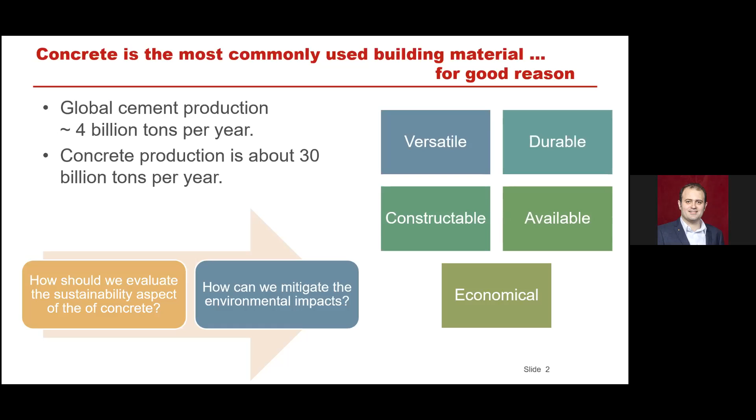But besides all these advantages, we should think about using these materials in a more sustainable way. And how can we mitigate the environmental impacts of this concrete mixture without compromising the performance level? So we decided to develop this ACI Eco Concrete competition to get all the students engaged in the concrete environmental assessment. And we define an objective and a research question for this competition: how can you as a member of the civil engineering community improve the durability and the environmental impacts of concrete mix design?

So for this version of this competition, we decided to go for the durability simulation using an approach to estimate the service life of concrete. And for the environmental impacts, we're going to use life cycle assessment as a tool to quantify the environmental impacts. I'm going to talk about each of these tools separately, and then I'll go through each tool and will give you an instruction related to the setup values.

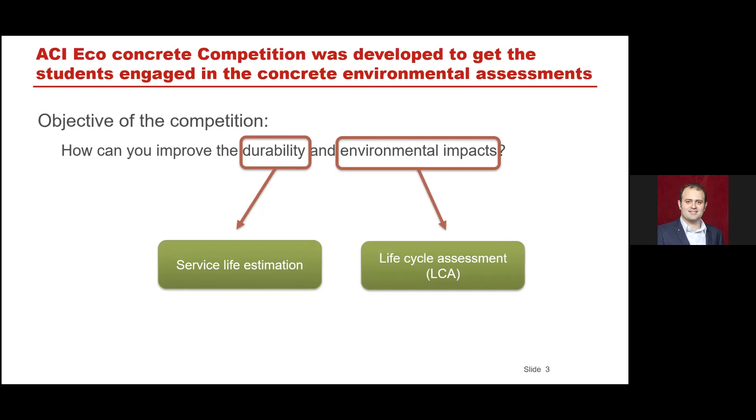First of all, about the service life. How do we estimate service life in this competition? We are going to consider the long-term chloride penetration resistance of the concrete mixtures, meaning that we assume that the concrete is exposed to chloride attack in a marine environment, and the chloride will penetrate and eventually result in corrosion on the rebars that you can see on the screen on this figure.

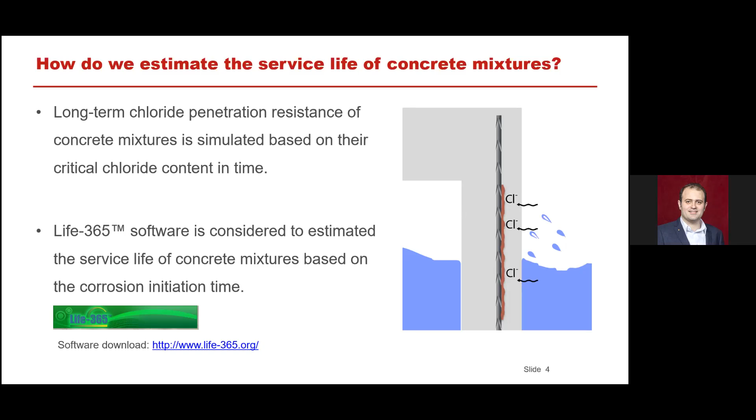And for this purpose, we are going to use Life 365 software. It's an open access software. You can download it from the link below for free, and you can use it for the estimation of the service life of concrete mixtures. And this is a good practice for young civil engineering students and practitioners to learn and find some insights about the durability properties and how to extend the service life of concrete mixtures that are exposed to marine or aggressive environments. This is about the service life, and here is about life cycle assessment.

Different stages of a product system, starting from raw materials extraction, production, use, and up to the end of life, will be considered. However, for the purpose of the eco-concrete competition, we are going to only focus on raw material extraction and the production stage. So we are going to quantify all the environmental impacts related to the raw materials extraction and production of concrete mix designs in our competition.

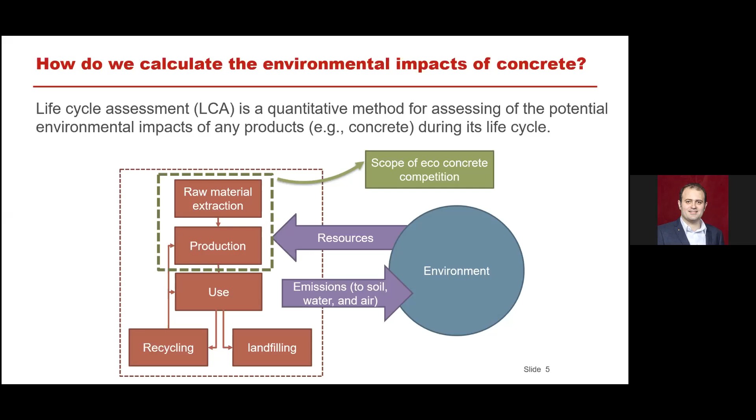So in the next slide, I'm going to talk about what we need for this competition and what you should do. For those who have already participated in the two previous versions of the competition, you're familiar with the base case scenario and alternative case scenario. For those who haven't, I'm going to explain it thoroughly here.

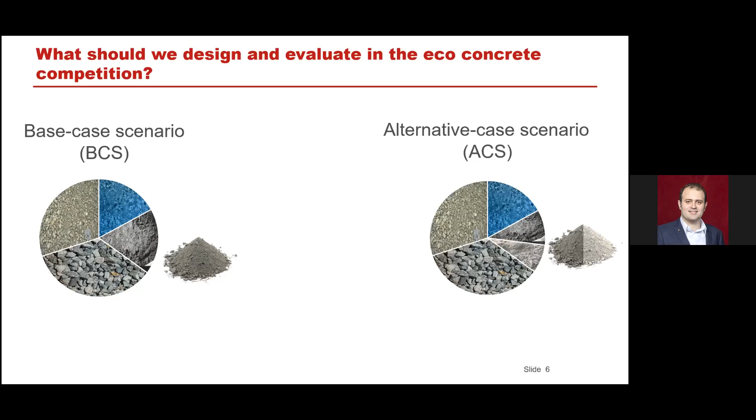So for this competition, first you need to define a base case scenario, which is a concrete mix design composed of 4 different elements: gravel, sand, water, and Portland cement as binder. On the other side, you have an alternative case scenario, which is equivalent to your base case scenario in terms of the volume of materials, but you partially replace the binder by different types of supplementary cementitious materials. And it is up to you what kind of supplementary cementitious materials, or SCMs, you want to use and to what extent you want to implement them.

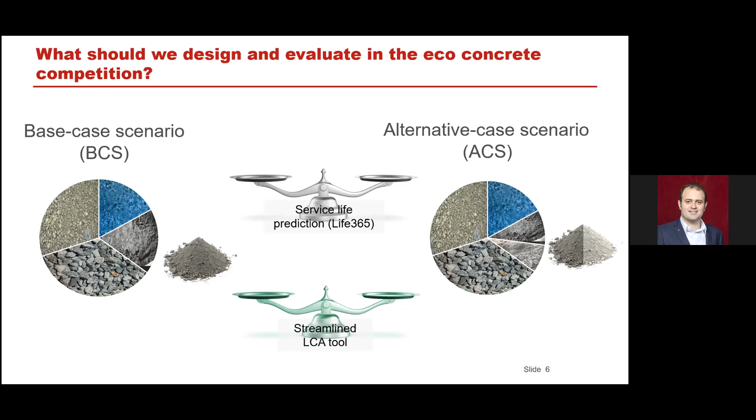And here we have 2 metrics, as you can see on the screen: the service life prediction and the life cycle assessment, to compare the durability and the environmental performance of these 2 mix designs against each other. So how should we define these mix designs? I'm going to talk about it in the next slide.

We have some setup rules to have a consistent implementation of the mix design for every team who wants to participate in the competition. I refer you to section 2 of the Eco-Concrete Student Competition rules that you can find in the link. I'm going to share this slide with you so you can click on that and get all the links and information for your review.

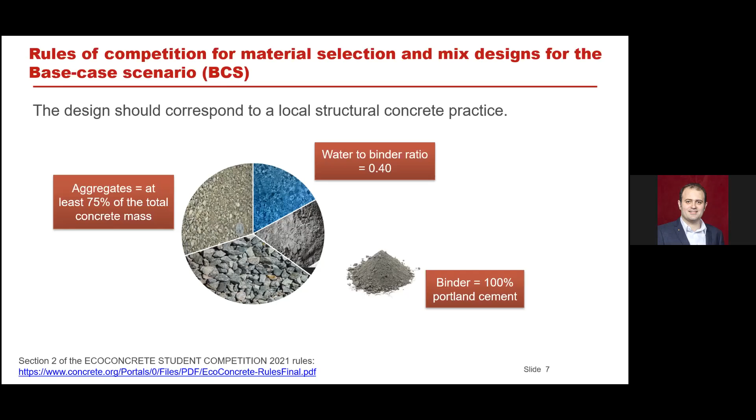So for the base case scenario, like I said, you need to define 4 different constituents of concrete, and there are some limitations here. Here we set up a water to binder ratio of 0.4, so 40% water binder ratio. And for your base case scenario, you have to use 100% Portland cement as a binder. The other important factor is about the aggregates. At least 75% of the total concrete mass should be composed of aggregates, both sand and gravel, in your mix design. So 25% binder and 75% of the total concrete mass is aggregate. This is about the base case scenario, and here is for the alternative case scenario.

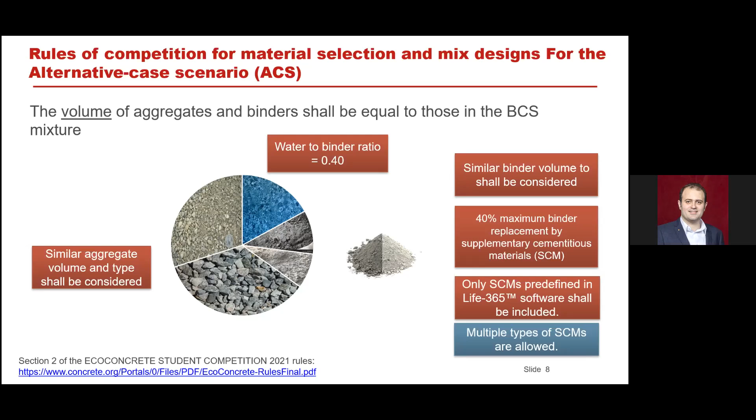And only SCMs predefined in Life 365 software shall be included, because we only have the option to assess the durability properties, or the chloride penetration, of the mix design with this software for those SCMs that have been predefined. These include silica fume, slag, and fly ash. But you can use multiple types of SCMs. You can have ternary blended cements. For example, some part is fly ash and some other part is slag, and these two are partially replacing the Portland cement. So these are about the mix design, both the base case and alternative case.

And here we go for the service life prediction using Life 365 software. So to do that, we have to follow a stepwise procedure as I described here.

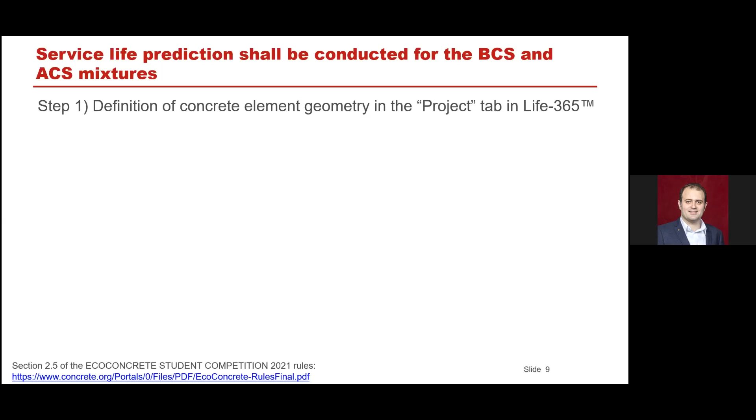And it's quite straightforward, but it needs your time to devote to learning about the details of this software and how to appropriately adjust your mix design. First of all, after creating the project, you can see this screenshot. This is the project tab in Life-365. Right after creating the project, you can see this on your screen.

This software can be downloaded and installed on both Mac and Windows operating systems, but I would recommend installing it on Windows. I tried it on both Windows 7 and Windows 10, and they are working perfectly. So here on the project tab, the first part is to define a title, which is your team name. And it's the 5 letters based on the rules that you can find in the Eco-Concrete Competition Rules version 2021.

The second part, which is more important, is about the structure type and the dimensions of the structure. Here, for the sake of consistency, we would like to have a similar definition of the structure type, the thickness, and reinforcing depth, as well as the area for all the teams. So type of structure should be set as slab and wall here.

The thickness should be 200 millimeters, and the reinforcing depth, meaning the concrete cover, as you can see on this figure, should be 50 millimeters, and we have the area of 5 square meters, which will give us eventually 1 cubic meter of concrete. And in the third stage here, you have to define the name of your mix design. The red one is the BCS, the base case scenario, and the other one is the alternative case scenario. And after the definition of the names, you will go to the second tab.

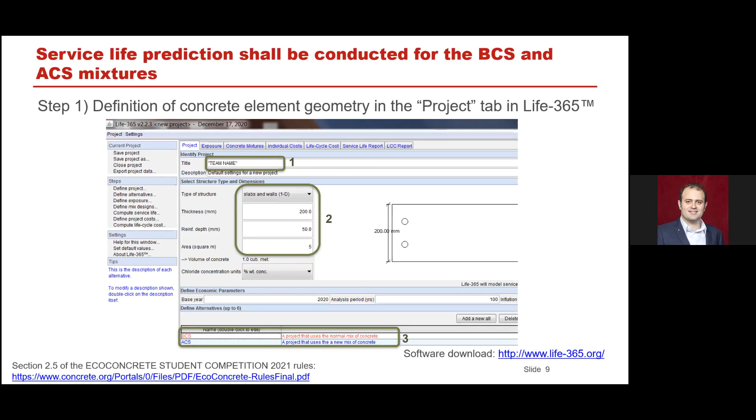You can see that on the screen, the exposure one. And here you have to define the exposure condition of your concrete elements, the concrete slab that you have defined in the previous stage. Again, for the sake of consistency among all the teams, we would like to set a preset value of the location for the state of Florida in the US, the city of Tampa, and in a marine spray zone for these 3 inputs.

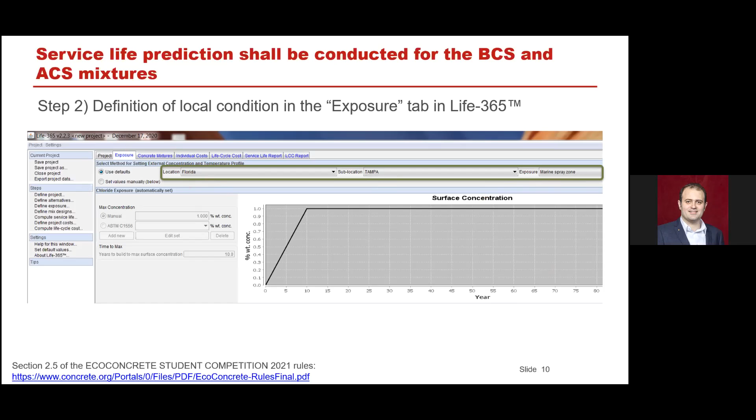And after that, it's important to insert your mix design in the concrete mixtures tab. And for that, as you have already defined the BCS and ACS, by clicking on each of these concrete mix designs, you have to enter the water-cement ratio, the quantity, the percentage of the slag, fly ash, and silica fume here. And here you have to repeat it for both mix designs.

So here, for example, you can see that it's my BCS mix design. So I don't have any alternative or supplementary cementitious materials. All of them are set to 0. But for my alternative case scenario, there should be some numbers here based on your perspective and insights about the durability properties. And on the other side, again, we would like to set the value of the rebar volume as 3%, and the rebar steel type should be black steel as well. No inhibitor is allowed for this competition as well.

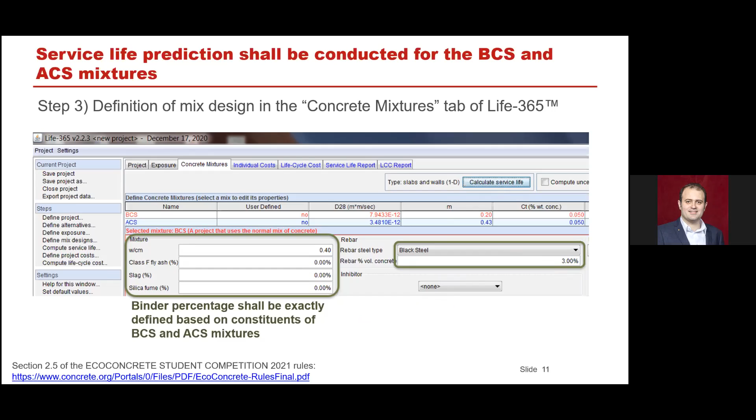You probably need to go iteratively throughout this process, and you will get back, you will optimize your mix design, you will change the values, and you can include this optimization process in your report as well to show what kind of trials and errors you have done to achieve an optimum percentage of the SCM replacement.

And the next stage is, how do we do LCA in the EcoConcrete competition? We developed a tool for this competition. It's a simple Excel tool that you can download from the EcoConcrete competition webpage. And it comprises two main steps. First, you have to insert your input numbers for the mix designs, both the base case mix design and alternative case design.

And then you will see the results on the summary sheet of the Excel sheet. It's a very straightforward Excel tool, but there is an instruction on the EcoConcrete webpage that you can go and download and use it to properly follow the stages to define your mix designs and get your environmental results.

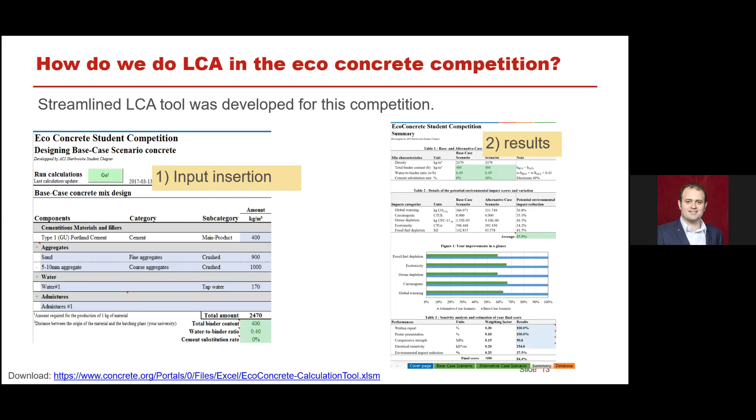So here we have to notice that after the mixture definition that you entered, for example, on this worksheet, you have to identify the material suppliers in your city, whether you're using slag, fly ash, cement, and aggregate. You have to consider and calculate the distances from the supplier sources. In other words, the fly ash source, which is like, for example, the coal power plant, or for example, cement plant, to your university, which is assumed as the ready-mix concrete plant and your destination.

And you should illustrate that on a Google map, to show the transportation distance, how much do you need to have in terms of road transportation, railway transportation, or waterway transportation, for example, if you are importing a material from another country. And once you calculate this transportation, you have to enter the appropriate value in terms of kilometer transportation distance, and the tool will automatically calculate the environmental impacts of this transportation.

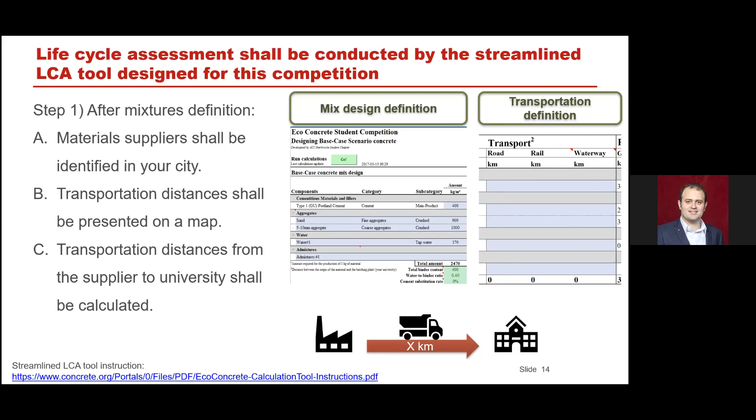And after finishing all this process, you will check if all the parameters are inserted correctly. In other words, you will see if all the boxes are green in the Excel sheet. Did you consider a maximum 40% cement substitution? Did you consider water cement ratio of 0.4 or the total binder content as well? So after this consistency and validation check, you will see the results on the screen. It's at the bottom of the summary sheet in the streamlined LCA Excel tool.

And you can see the average reduction of the environmental impact in 5 different categories: global warming, carcinogenic, ozone depletion, ecotoxicity, and fossil fuel depletion. These are the environmental impact categories that we have included for this life cycle assessment. And what we have noticed from the previous versions of this competition was that students mostly discussed the idea around global warming. But what would be more interesting and important, probably a better score, is to discuss what are the main drivers of carcinogenic, ozone depletion, or ecotoxicity, or even fossil fuel depletion for concrete production.

Global warming is important, but how about carcinogenic? Did you see any contradictory results? How do you interpret the results in other impact categories? And at the end, the average improvement will be calculated here and will be considered as your LCA score in your report for this competition.

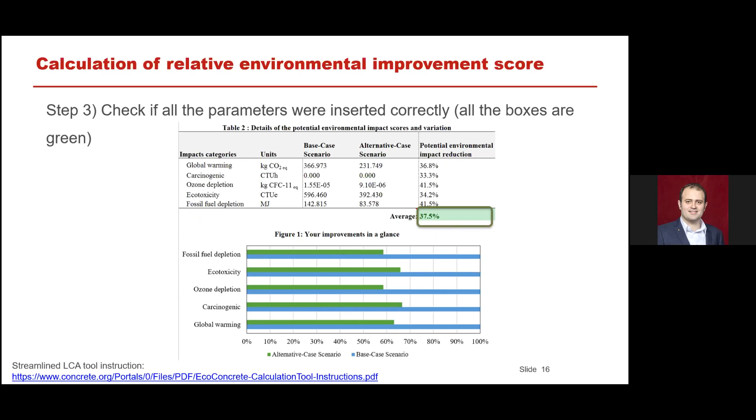So the third part of the scoring is about a written report. So first we have the service life estimation. Second, we have life cycle calculation. And the third one is the report that you have to submit and develop for this competition. It should be in PDF format. Check the due date, definitely, because after that, you may get penalized or you may not even be included in the competition. It shouldn't be more than 20 pages. We would like you to have enough illustration of maps and results to make sure that our reviewers and judges will understand your results clearly.

And we would like you to have a discussion around the results and how they can be applied on a larger scale in your location. Basically, your vision about the mix designs that you have developed in terms of the materials availability, the mix design, the feasibility, the possibility, and the issues that they might be exposed to if they want to implement the alternative mix designs that you have developed or proposed in your EcoConcrete competition.

And the fourth part of this competition would be the video recording that you should submit along with the other three previous stages. For this video recording, those who have participated in the concrete solution competition know that it's a relatively short video that you would make to present your results in an innovative way. It shouldn't be longer than 7 minutes.

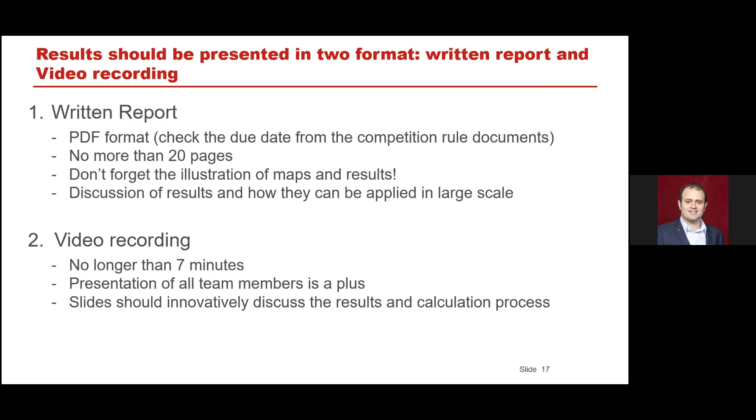And we would like to have the participation of all team members. And it would be a great advantage and great scoring if all of you can talk and present your results during this video. So we need the link of this uploaded video on YouTube, and it should be submitted along with other documents for this competition. And last but not least, score calculations and question and answer during the interview.

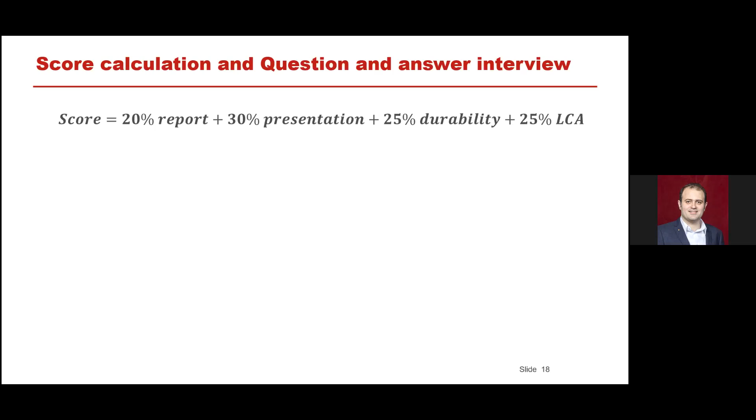So we gave some weights to each component of this competition. 20% report, the quality of your report based on a very detailed structure, which is already included in the EcoConcrete competition rule. 30% presentations and interviews, 25% durability scores, and 25% LCA score would be considered for scoring.

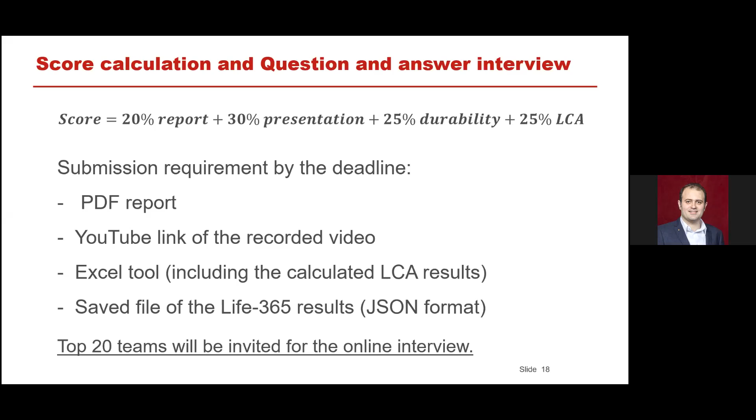And for the submission, you need, again, 4 different documents. First, the PDF report, second, YouTube link, and third, the Excel tool already filled out based on your LCA results for our verification. And last, the saved file of the Life 365 results. It's a JSON file that you can get from the software easily. And we only invite the top 20 teams for an online interview before the convention, obviously. So you will have the complete scores and we will have the ranking based on that.

So again, I would like to emphasize 3 important documents. The first 2 are already included in the previous slides, but the last one is about sharing the experiences of the previous EcoConcrete competition. There were some outcomes and some lessons that we learned from the students in the previous version of the competition. It's very important for you to review those points and consider them when you're developing your mix designs and when you're writing your reports and presentation.